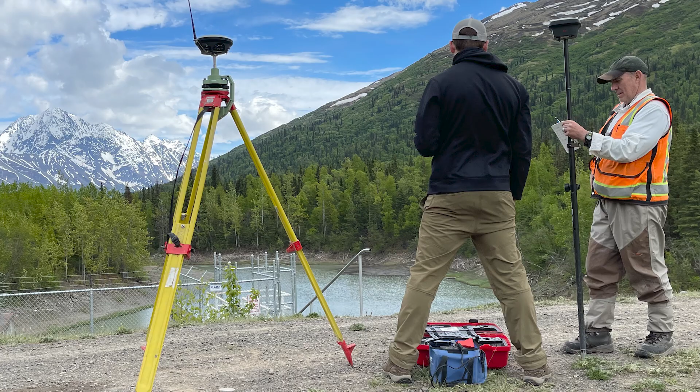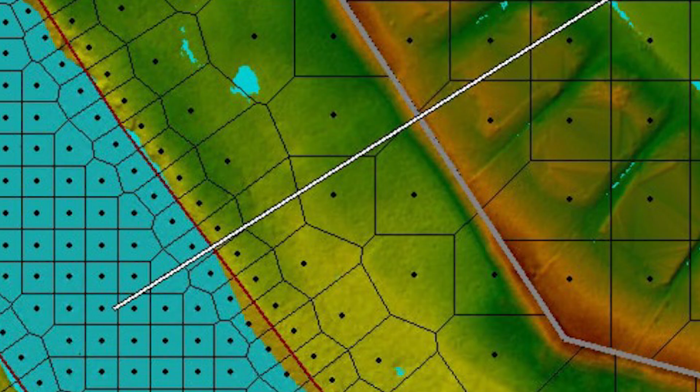Well, I imagine there'll be lots of opportunity to get out into the field too, which attracts a lot of younger engineers especially. So if you like getting out in the water, into the rivers, and going on some really cool hikes to do some work out in the field, this is a good opportunity for you. But there'll be a lot of opportunity to do some modeling work as well. As you know, Ben and I do a lot of HEC-RAS modeling. We also have folks in our section that do a lot of CFD modeling. So lots of opportunities. This will be a really fun position. Ben, what do you look for in a new hire?

Yeah, obviously it depends on the level that we're hiring for, but for this position, I think the biggest thing that Chris and I always look for, especially in interviews, is just a real interest and energy around learning. We're not naive enough to think that anybody hired at this level is going to come in day one and know exactly how to do all these different projects and analyses. But what we do want to see is somebody who's really interested in learning and has a lot of energy around that. That has been really successful for us in the past in finding good people and building out the H&H team. Obviously, if you have experience in some of the software we're going to be using, that's a bonus.

Also it would be a huge benefit if you're located near one of our company offices and can prioritize coming into the office and seeing people a few times a week. That's not required, but certainly something that we're strongly considering, because we've had a lot of success within our H&H team having quite a bit of in-person touch points. And Chris, I'm glad you brought up the idea of field work, because that is something our junior staff are asked to assist a lot on.

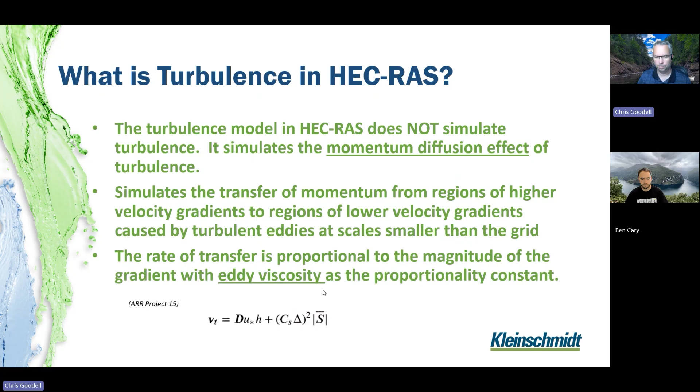So here's the equation. What RAS does is it actually computes this eddy viscosity coefficient, this V sub T value, and it's based on two types of turbulence. You've got longitudinal and transversal turbulence created from the bed of the river, which is on the left-hand side, and then you've got turbulent effects from the edges of the river. Okay, so let's get into this a little bit more. Ben, what do you got?

Yeah, so I thought that was a really interesting point you made around that being a surrogate for viscosity, right? And I think everybody, even if you don't have a deep hydraulics background, can appreciate the difference in how water can feel as you're moving through it, depending on how much turbulence there is. So if you're swimming through a flat, unmoving swimming pool, that has a consistent viscosity to it, and it feels very smooth. There's not that disruption.

Versus if you're floating down a river and you go through some rapids and you start to feel some of that turbulence, and particularly if you try to swim through some of those, it can almost feel as though the water has a different viscosity than a slow moving, normal water body would have. So that's a really interesting analogy that you gave.

And again, if you can picture swimming through a body of water like this, there would be times in which you'd almost feel as though you're not swimming through just normal water. So that's a cool way to think about how this additional loss of energy in the system needs to be potentially accounted for, especially as the importance of evaluating the results in a near field setting becomes highlighted. Yeah, yeah.

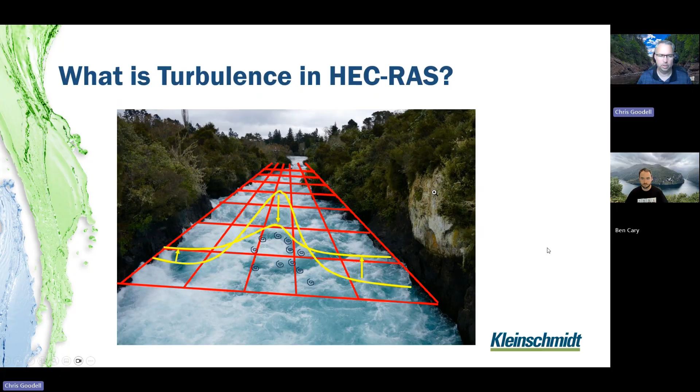Chris, another question that I think a lot of people have when it comes to turbulence is how do you balance and prioritize turbulence and Manning's roughness, right? These are both coefficients that help reduce energy within the system. They both kind of account for similar types of physical things in the riverine environment, and they both have a lot of uncertainties. You can play with both of them to try to get these calibration results to match better potentially. So when somebody asks you that question, how do you approach prioritizing Manning's and turbulence, which one you adjust, which one you don't?

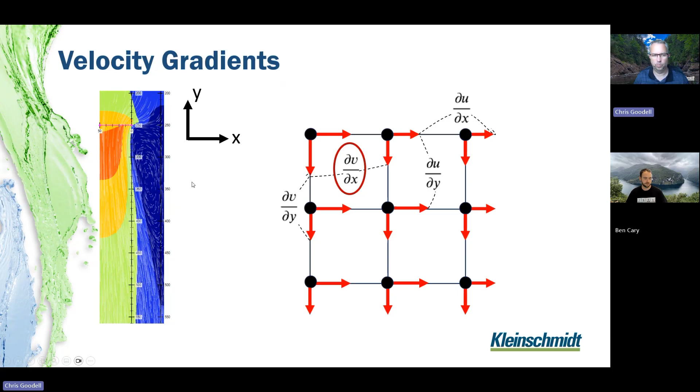So this is also what I'm going to show you in just a little bit: these flume demonstrations I did to test out turbulence and show how changes in your turbulent parameters affect the results and whether or not you use turbulence or not. But we'll get to that in a second.

So I mentioned before that RAS considers two types of turbulence: turbulence from the bed, both in the longitudinal and the transverse direction, and turbulence from the edge, the boundaries of your model. Okay. So over here we have a longitudinal and transverse mixing coefficient, that's the capital D, multiplied by the shear velocity times the depth of water. Each direction has a different diffusion coefficient for longitudinal versus transversal. And there's recommendations in the manuals of what values to use here for different types of turbulence. I'll show you that in just a little bit.

We also have the right-hand side, which is the Smagorinsky part of the equation. And there's a coefficient. The manual also provides guidance on what to use for this C sub S value. And then you've got this local grid resolution, delta. Okay, this is basically just the size of your grid. And then the strain rate, which is capital S. Notice here we've got our velocity gradients worked into the calculation of strain rate, right?

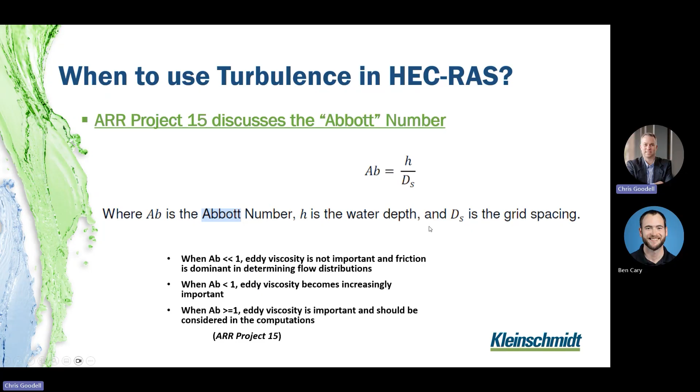So it's important to look at your Abbott numbers in your model. If your Abbott number is much less than 1, then eddy viscosity is probably not very important, and friction is going to be the dominant form in determining flow distributions and diffusion. When you start approaching an Abbott number of 1, in other words, your depth of water is on the same order of magnitude as the grid cell spacing, then eddy viscosity becomes increasingly important, and you might think about turning on turbulence. When your Abbott number is greater than or equal to 1, you should definitely at least test turbulence and see if it makes a difference.

Yeah, that's a really interesting concept. Again, something that trips people up, right, is the consequences of using smaller cells in your 2D mesh, and the idea that as your cells get smaller and smaller, the importance of including diffusion increases is not something I think is common knowledge out there. And really, the reason why people select a more refined mesh is typically because they want more detailed results.

They're doing some analysis around a particular object or through a bridge opening, or as it pertains to the passage of fish through a complicated series of falls, those types of questions where you really want detailed, accurate results near field, and yet you might not be using one of the more important parameters in the equation when you have those really, really small refined meshes. So yeah, really, really cool.

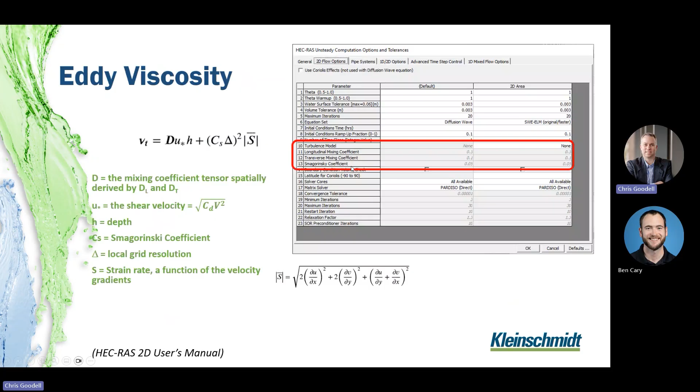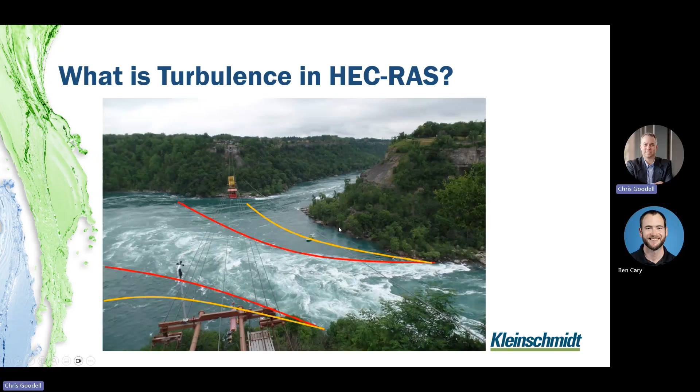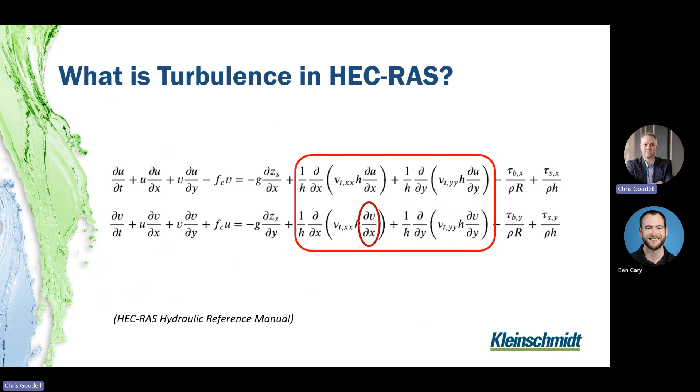And I think there's a lot of misconception out there too that our river needs to look like that picture at the beginning of the slide, this one, before we should think about turning on turbulence. That is not the case at all. Yeah, this is a very turbulent looking river, but I have a little secret for everybody. All rivers are turbulent, whether they look like it or not. If you're basing turbulence on the classical definition by Reynolds number, pretty much all rivers are turbulent. There might be some slight exceptions, but they're pretty much all turbulent.

So the question is, when does turbulence become an important contributor to the overall energy loss and momentum exchange in your system? That's where you need to include it in the model. As I mentioned in the previous slide, the numerical scheme in HEC-RAS without turbulence turned on already provides some inherent numerical diffusion, because of the roughness that's built into it. But the smaller the computational size and time step, the less numerical diffusion you're going to get. And that's when you might want to think about turning on turbulence to recover some of that. An Abbott number is a great way to check and see if you're in that range where you should start thinking about including turbulence.

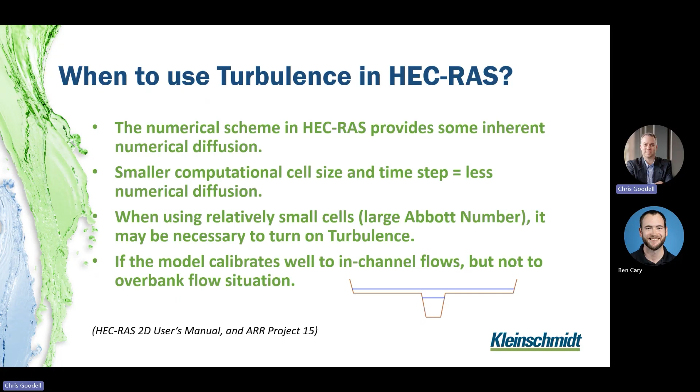Another reason is if your model calibrates very well to in-channel flows, but as soon as the water gets out of the channel and starts spilling into the floodplain, the overbank, you're having a tough time calibrating anymore. A lot of that could be because you're not including turbulence in your model. Or another way to look at it is a way to better calibrate in that situation is by turning on turbulence. Of course, you can also play around with N values there and maybe get the same effect, but turbulence is there as another knob to turn.

All right, so I wanted to get a feel for how all these coefficients and different cell sizes will affect the diffusion rate in a simple flume. So I built this flume model. This is just a rectangular flume, I think something like 1,000 feet long, maybe 100 feet wide. And I looked at grid cells of 10 meters, 2 meters, and 0.5 meters so that I could compare different Abbott numbers. And the Abbott numbers that resulted from this were 0.26. That's much less than 1. So in theory, turning on turbulence is probably not going to be necessary here.

Then this one's close to 1, where you should start thinking about turbulence. And this is much greater than 1, where turbulence should be considered in your model. Okay, I also inserted a solid wall right here. Just a terrain modification, just a solid wall that forces all the flow to squeeze through this opening on the side. And that's going to set up an eddy pattern right here, as the water spreads out and diffuses. Okay, you get this eddy pattern.

And you'll see with different coefficients, or turning turbulence on or not, you're going to see differences in the size of this eddy pattern, which is another way to look at the rate of diffusion in here. And so I consider these different coefficients. These kind of span the range of values that are recommended by the manual. So basically what I wanted to find out here is how is diffusion affected by the turbulence coefficients.

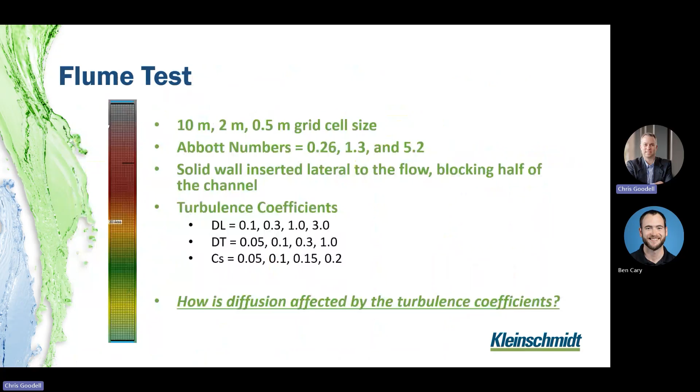Now, if you focus in on the no turbulence, the one on the left, as I flip through the different cell sizes. Oops, I was going the wrong way here. Okay, notice no turbulence. It diffuses down to about station 445, maybe. Okay. Just by changing the cell size, not turning on turbulence, notice it jumps all the way down here. We're getting less diffusion with just decreasing the cell size. And then when I go to 0.5, even less diffusion.

Okay, so that's important to note. How do you recover that? If this is the real answer, this is what it should be, but you want to use a cell size of a half a meter, you're going to have to somehow push that diffusion back up here to 445. And you can do that by turning on turbulence and using relatively high coefficients.

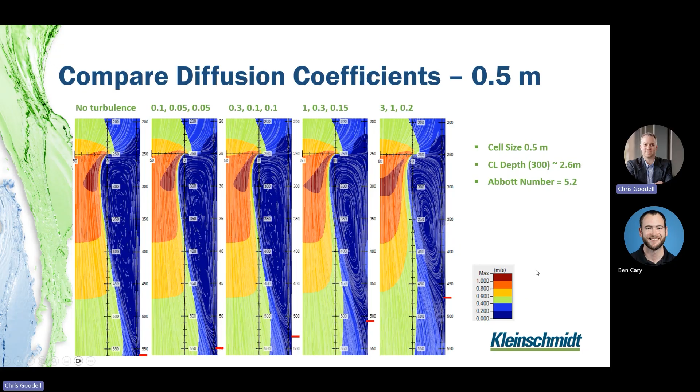Okay, here again the first one is no turbulence, and then the second and third ones represent a change in longitudinal diffusion coefficient from the low end of 0.3 to the high end of 3. Makes quite a bit of difference. But when you look at your transverse coefficient, not quite as much of a difference. So this example is most sensitive to your longitudinal diffusion coefficient. I'm not saying that's going to be the case for every project out there, but in this particular flume example, that's definitely the case.

So Chris, let's dive into that. So the longitudinal coefficient is the most impactful in this flume example. Is that in part because it's a flume and you don't have a lot of the, I guess, edge effects that a complex river might have, where you're going to have more transverse mixing? Or what situation would you expect that to be flip-flopped, I guess?

Well, I think the primary flow is moving in the longitudinal direction. I think that's the biggest part of it. Now, if you had flow spreading out in all directions, then maybe your transversal is going to be a bigger impact. But I think it really boils down to primarily water's moving in the longitudinal direction in this example. And so it makes sense. But then the other thing too is notice the coefficients are a little bit higher for longitudinal than they are for transversal. So that plays a part in it as well. Sure. Okay. Yeah, that's interesting.

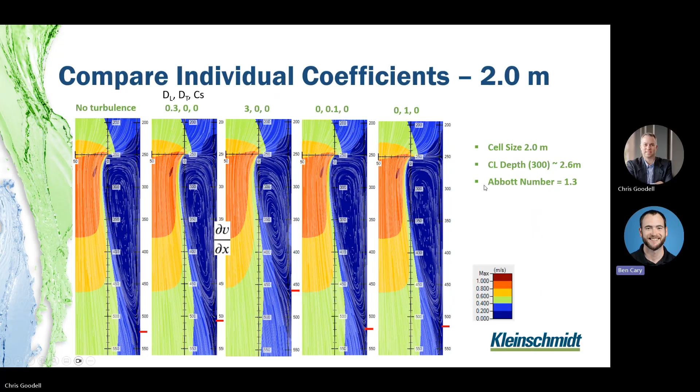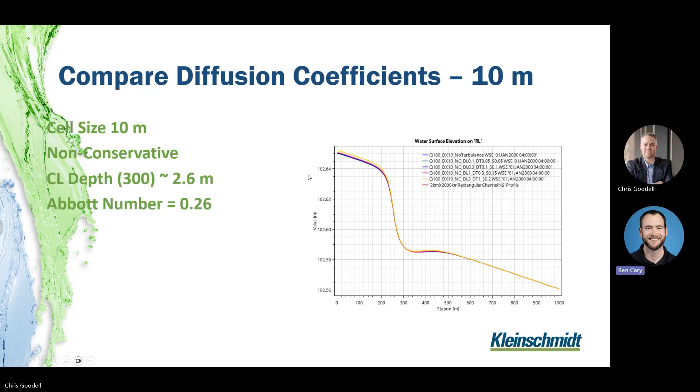Okay. This is with 10 meter cells. Was that the same with 0.5 meter? Yeah, not a whole lot of difference. I mean, there's a little bit more of a spread with the smaller cells, but we're still talking less than a 100th of a foot difference. Okay.

So the takeaway for me here is if your objective is really just to get water surface elevations from your model, maybe it's a flood study, you want to see amount of rise upstream by putting in a bridge or something like that, turbulence is probably not going to be a big player in your results. It's going to be more about N values. And you can test it out on yours, and I highly recommend doing it, especially if your Abbott numbers are high, or there's a lot of contraction and expansion in your particular model. I highly encourage you to test it, but I bet you're not going to see a big difference in water surface elevation. I mean, look at this. This is less than a 100th of a foot, maybe up to 5,000ths of a foot difference at the high end here. So yeah, take that for what it's worth.

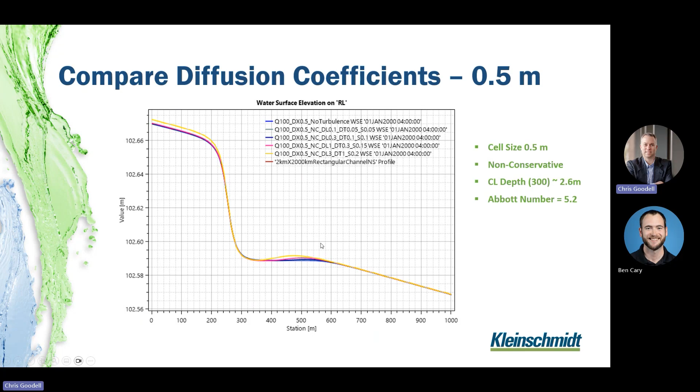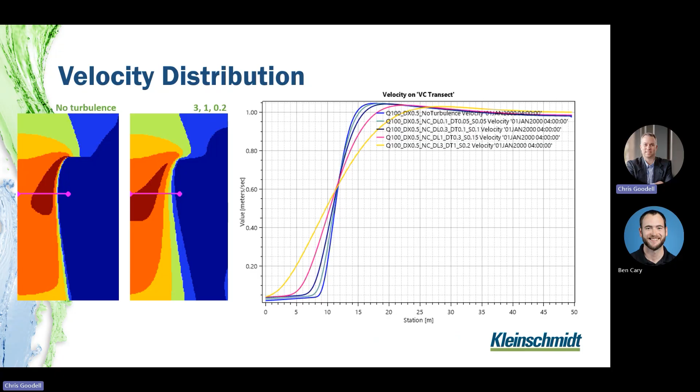Yeah, so let me end it with a couple more slides here. First of all, there are two different turbulence models available to us. One is called conservative and one's called non-conservative. The non-conservative is actually the original turbulence model that was added into RAS when 2D RAS first came out in version 5. Boy, has it been like 11 years already? I think it has. But then they added a new model called conservative, which, as the name implies, conserves momentum better than the non-conservative one does. It's just the solution scheme that's used is a little bit more conservative.

And so the manual will say, hey, just use conservative. That's the better one. The non-conservative is still in there so that your older models will still work and produce the same answer. But we recommend that you use conservative for any new models. That's what the manual says. I also look at it in terms of near field or far field modeling. When you're doing near field, I think it's more important to conserve momentum than when you're doing more reach wide modeling. It's maybe not as important. You could probably get away with non-conservative and it'd give you a similar answer to conservative.

The other thing is conservative is, in my experience anyway, harder to make work. It crashes more readily than the non-conservative one. And maybe that was just me and my particular models that I was trying to use it on. Maybe that's not technically the case everywhere, but I found conservative a little bit more difficult to use and it takes a little bit longer to run. So in practice, I think non-conservative is going to be faster, easier to use and stable. It compares well to conservative for reach wide studies, but if you're doing a near field study, I highly recommend you at least consider or try conservative.

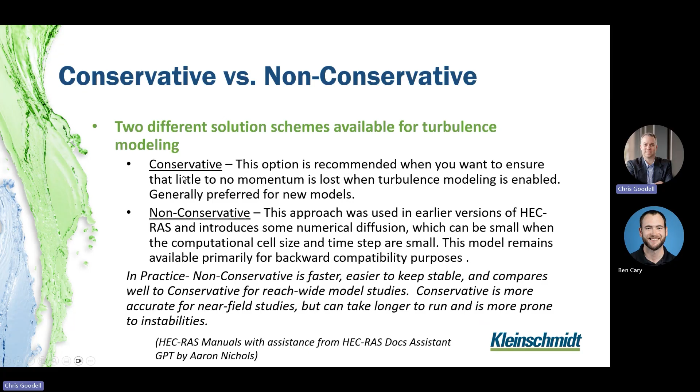So let's get to the bottom line here because I think that's what people are interested in with turbulence. If you've got high Abbott numbers, remember your Abbott number is just your depth divided by your cell size. If you have high Abbott numbers, test turbulence. If you have significant velocity gradients, by that I mean change in velocity spatially, test turbulence. If the water looks turbulent, test turbulence. If you have significant eddy patterns in areas of interest, and in particular, you're interested in those flow patterns, test turbulence.

Calibrate if you can, if you've got data that you can use to calibrate, and this could be velocity measurements. Obviously, we saw that water surface, at least in the example I showed here, is not very sensitive to turbulence, but certainly your velocity distribution and your eddy patterns are sensitive. So if you have that kind of data that you can use to calibrate, definitely do that.

If not, and you do feel like turbulence should be used in your model, then do a sensitivity analysis on those coefficients. And whenever you do a sensitivity analysis, I always encourage people to understand what a conservative result is, because when you do a sensitivity analysis, you're looking at a range of realistic results, but you ultimately have to pick one to use, right? And the one you pick is going to be the one that gives you the most conservative results.

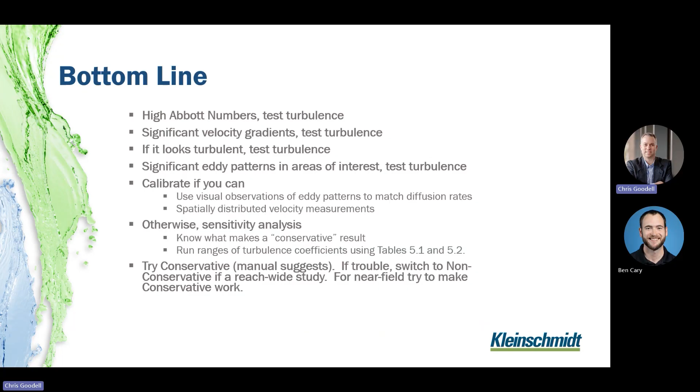So that's turbulence. I hope everyone feels better about what turbulence is in RAS and when they should be using it. But I think I'm probably going to use turbulence more in my models, Ben. I don't know. What do you think? Yeah, I think it definitely doesn't hurt. Again, I'm kind of convinced just because of your point around the change in flow patterns. I'm typically focused on water surface elevations, especially with most of the work that we do. But I think your experiment, as well as just kind of thinking through it, certainly I think it's important to accurately account for the flow patterns and not just the water surface elevation.

So maybe in the next couple weeks, we can do some testing of that steeper slope flume and seeing if that makes a difference, because I'm curious at which ranges of velocity your conclusions are applicable to. But nonetheless, a very cool test, an interesting concept, and an important parameter to be aware of for anybody who does 2D HEC-RAS modeling.